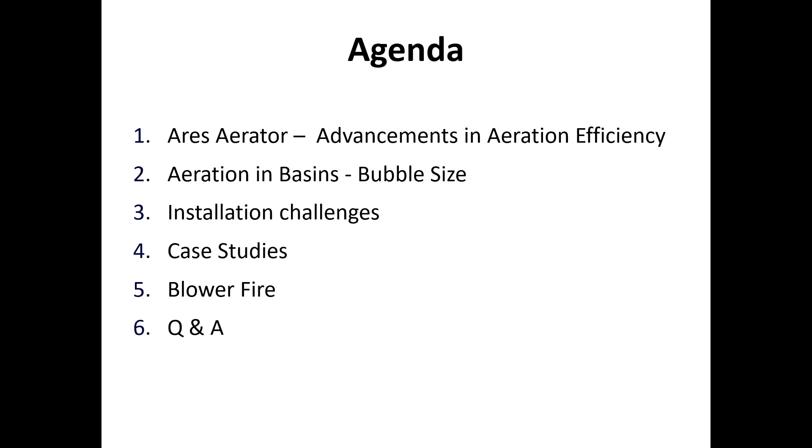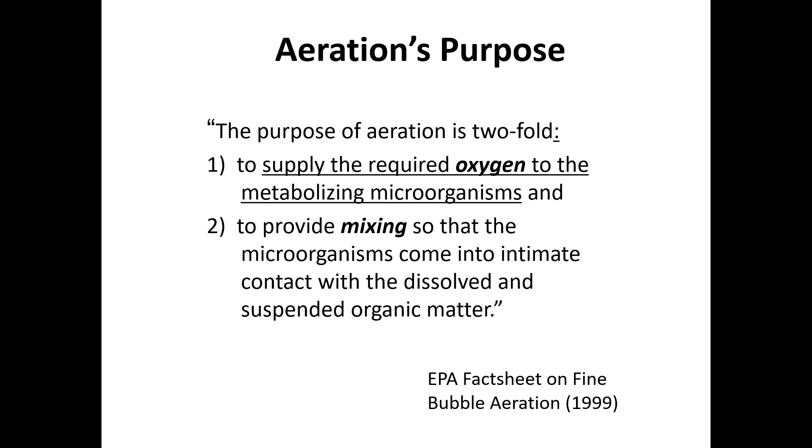So aeration, just at the high level, is all about giving oxygen to the metabolizing microorganisms and providing mixing. It's just the two things. We're putting oxygen for the bugs and we're mixing things up. You got to keep things mixed up so the bugs can get to the oxygen.

So just another high-level understanding in the lagoon space about treatment levels. I want to just cover real quick with this slide. You have a facultative lagoon, which has no airflow, just natural. And you can get a lot of airflow from natural, that upper portion. Humidity and wind is your friend when you're in the lagoon business because air will infuse DO in that, especially that upper 18 inches. And the standard reaction rate for a facultative lagoon, you do get treatment. You can see that those values in the right-hand column.

And then we move to a partial mix lagoon, and generally that's defined as 2 to 5 standard cubic feet per minute per 1,000 cubic feet of volume, and you attach a reaction rate of 0.28 when you're doing your calculations. Then there's a not well-known mix that we learned from an engineering firm some 10 years ago in the West, and the one I just mentioned earlier, just installed in Southern Idaho, which was a municipal, uses a vigorous mix there that was engineered by Jacobs, is 7 to 8 standard cubic feet per minute per 1,000 cubic feet, and you get your reaction rate of 0.85, so it's a little bit more reaction going on.

And then a complete mix is almost an order of magnitude more than partial mix. That's everything in suspension. It's 10 to 15 standard cubic feet per minute, and then you can actually mix RAS too, and that just takes quite a bit more air. RAS, return activated sludge.

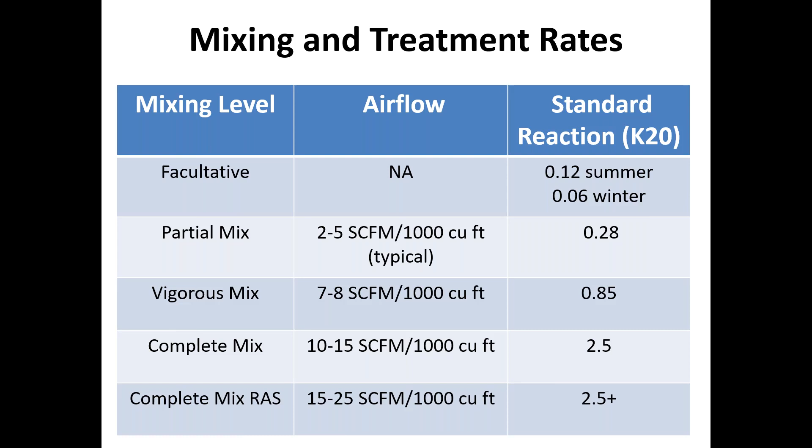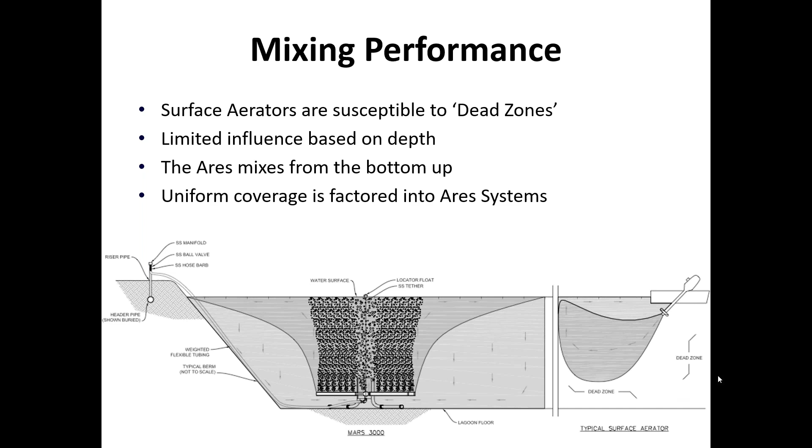So just a profile view here, I'm kind of going to parallel a typical surface aerator versus the aerator that we use a lot and have good success with in food processing. We release air about 9 inches off the bottom, so you destratify the entire column and you mix and you pull in from around the aerator up through a central tube. I got another slide that will show that a little better. Oftentimes with the surface aerator, you're kind of limited, you don't get quite as much mix zone.

Again, this is a cross-section profile of the aerator, and this is a hollow tube. We pull up inside the hollow tube and get solids up into the treatment column, and we're able to reduce solids quite a bit by this sort of mechanism.

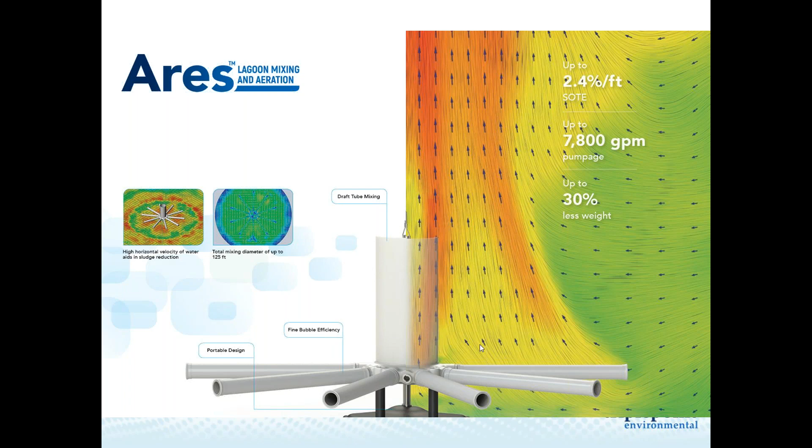Here's some of the shots of computational fluid dynamics work that we have done. Key thing to understand about this aerator is these are all fine bubble radiuses here, and we have a coarse bubble inside that is for mixing. I'm going to get into the sizing of fine and coarse bubble in a couple slides from now. The coarse bubble is about 10% of this flow and gives us a really good mixing, and we get to real good transfer efficiency by these diffuser tubes, fine bubble diffuser tubes.

So this slide, if we were just traveling up an elevator, sitting having coffee, it would probably be the slide I would use to explain how the subsurface diffused aeration works, and the way Triple Point does it, and other companies do this as well.

More or less, we've got a positive displacement blower on land. We convey air through a header over to a manifold system. The manifold system above shore feeds the aerators by flexible weighted line out to each aerator with individual ball valve. Each one of those could be turned off.

In this instance, this graphic, this one's turned off, and maybe they're pulling this up to do maintenance on it or installing it initially, and we can turn the air off right to that one, which also allows you to move air around a little bit inside a lagoon if you want a little bit more air to the front or the back for some reason operationally. As time goes by, you have that capacity with these ball valves on shore.

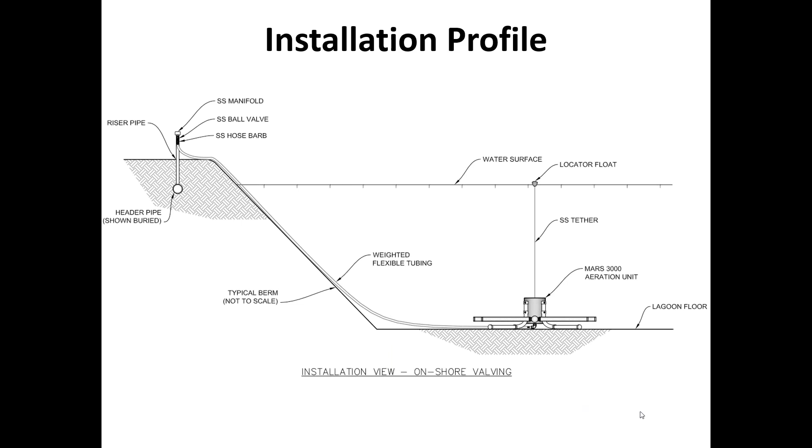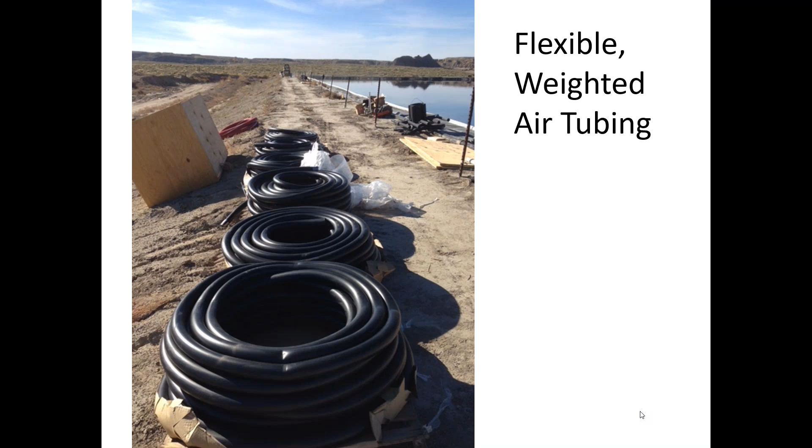And this is just some of that hosing on pallets, it looks like when it arrives. Now, this location I'm at, it's cold, and they actually took these into some warehouse to warm them up. But once you get them pulled out, I say pull them out and get them out in the sun a little bit, and they'll lay just like this.

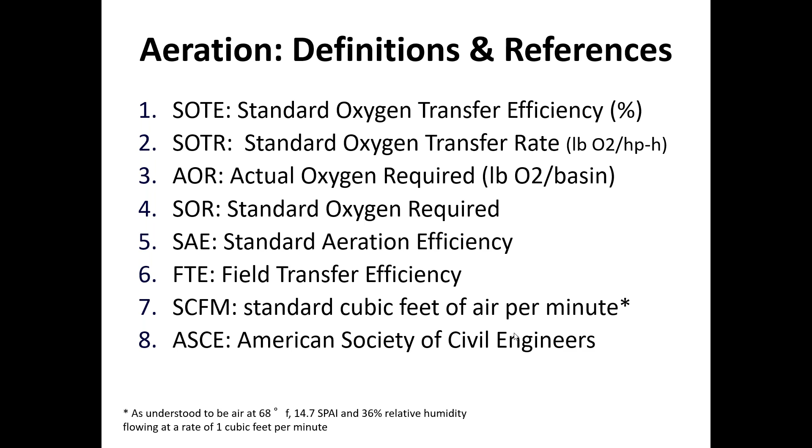So there are typical acronyms used in every business, and most of these are probably familiar to a lot of folks. I'm going to look at SAE here in a couple subsequent slides. SCFM we use, standard cubic feet of air. You can see the rest.

So in the efficiency space of aeration, it comes down to pounds of oxygen per horsepower per hour. If we looked at a mechanical surface aerator, you're looking at approximately 2.5 to 3.5 pounds of oxygen per horsepower per hour. If you went up and looked at a fine bubble diffuser, you were looking at approximately 2x of that, at 6 to 6.5 pounds of oxygen per horsepower per hour. This is significant to look at because we see a lot of mechanical surface aerators.

That's why I'm isolating on that. And this is kind of where we fall in, along with others, with fine bubble treatment. It gets significant because of potential power savings. So if you're running 100 horsepower with a surface aerator, maybe you can get that done with 50 to 60 horsepower of subsurface aeration.

And then the utility company will say, okay, you're going to save that power permanently back to the grid, and we'll run this formula and offer you an incentive for making this upgrade. It doesn't pay for CapEx, but it'll offset CapEx to a degree.

This site I'm at right now, which happens to be an Apple processor, is actually taking surface aerators out and putting subsurface diffusers in, and they are going to get a rebate. We just finished that with a sugar beet processor too, and got a pretty significant rebate. It correlates obviously to the size of the operation.

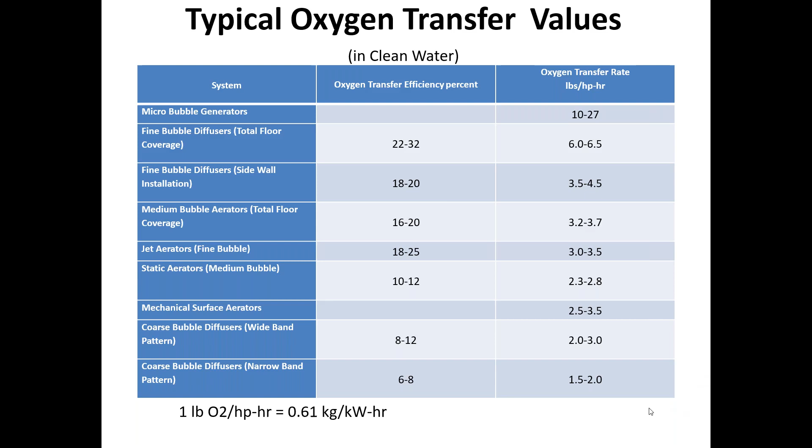Now, I will note that of all these technologies, the SAE test, which is developed by the ASCE, the Civil Engineering Group, is conducted in clean water at zero elevation. So everything gets derated for the constituents in the water, whatever situation you're in. That's linear pretty much across the board, but it isn't exactly so. If you're at 3,000 feet elevation dealing with 3,000 BOD, it would be something less than that in all these situations.

So a couple more 101 statements. O2 is known to oxidize things like H2S, hydrogen sulfide. And I like that point because it's generally considered a chemical reaction, not a long process like biology where we've got to get it up and going for 3 to 6 weeks to get it acclimated. It's the same with the bottom bullet there on metals. There are academic papers that support this, that O2 transforms metals such as iron and manganese to an oxidized state. These are reactions that occur pretty much when you expose fine bubbles to these constituents.

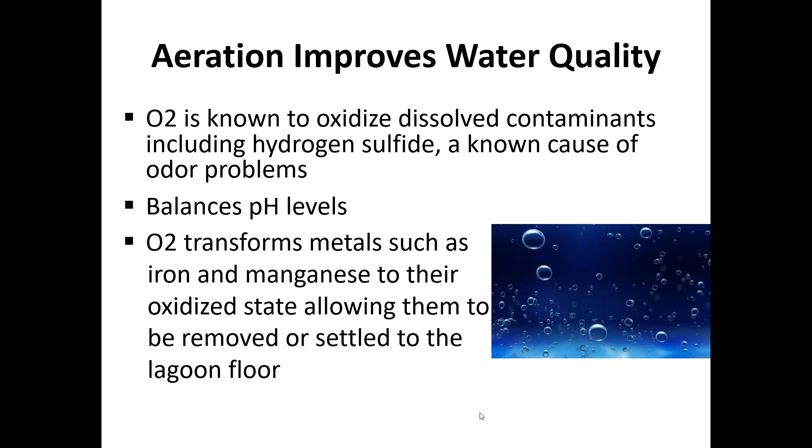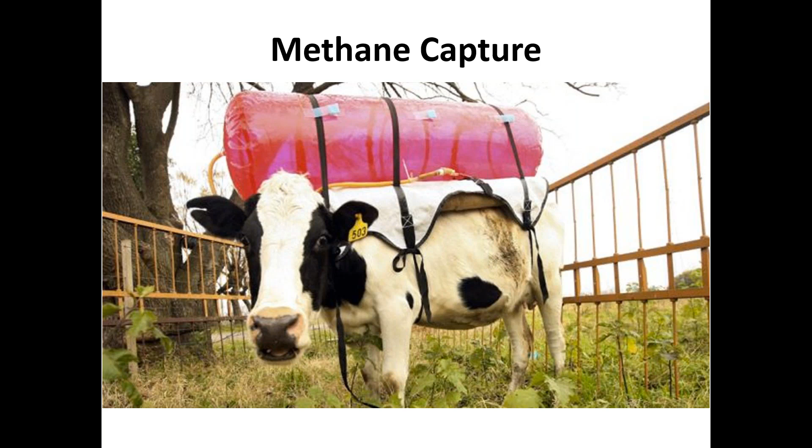And this slide is just, if anybody fell asleep yet, this was a methane capture. This is actually a true research project in Australia for methane capture, but it has nothing to do with this presentation. I just wanted to see if everybody's awake yet.

So getting on to bubble size, all these 3 graphics are 1 cubic foot of air, one cubic foot of a bubble, of volume. So on the left, that's a 12-inch bubble. Think of a basketball as 9 inches, so that's 12 inches. So we look at the surface, square feet of that is 4.8.

Now, if we go to the middle view, and we consider those 6 inches, half of the 12, that's 185 square feet. Now, I said I was going to give definitions, this is where we'll talk about the definitions. Coarse bubble is considered 4 to 6 inches. Literally, 4 to 6 inches is the standard acceptance in the industry of a coarse bubble.

And if we go to the right, what we're depicting there is a fine bubble. Fine bubbles are measured in metric or in inches, generally considered 1/8 to 1/4 inch, so quite small. So you take that same volume, now look at the surface area square feet you've got, 1,800 square feet. That's where you get tremendous oxygen transfer. You get good mixing with your bigger bubbles, your 6-inch coarse bubbles, but the oxygen transfer is significant when you look at the surface area of those.

Also, when we talk about chemical reactions, I don't go deep into this in this slide, and there are others who are way more capable of discussing it, but there's an electrical charge on the surface of those. That's why you get this foaming. I'm going to show some foam pictures that occurred within hours to overnight. They're just incredibly significant. When you have nothing in the water and you put in fine bubbles and turn that on, there are reactions that begin going on right away while the biomass begins to build itself and acclimate over a period of time.

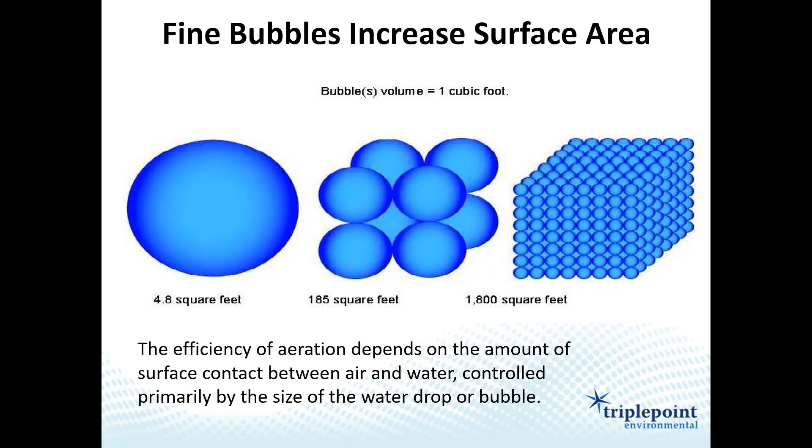Another thing about depth and bubbles is retention time - they hang out more. There's folks working on nano bubbles or micro bubbles, and I think that's cool because I love R&D. Best I know, they're pumping water up to a dike or inside a building, treating it, and returning it to the pond. They get these nano bubbles that don't particularly rise, they just hang out. I think that's a smaller flow application, but if they figure it out for bigger flows, that's going to be very interesting.

But right now, it'd be very difficult to transfer nano bubbles through a piping system down to the bottom of the pond. It's not practical at the moment. But depth and rise time and bubbles hanging out in the body of water - they spend more time hanging out when they're smaller. That's the short version of that thought.

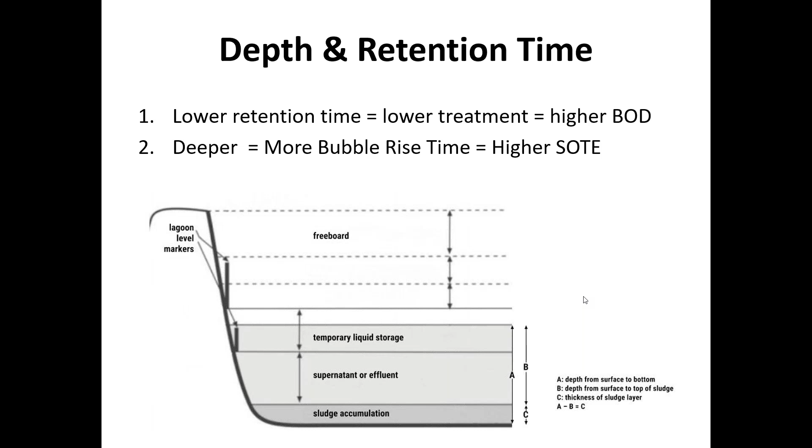And they didn't have a Sludge Judge. So I bought one and went over there, went out in the boat, and did a full grid. And I said, you've got 4 feet of sludge in there. Of course it's less viscous up here than down on the bottom, but it would run right out - it was a runny sludge, not compacted hard on the bottom or anything.

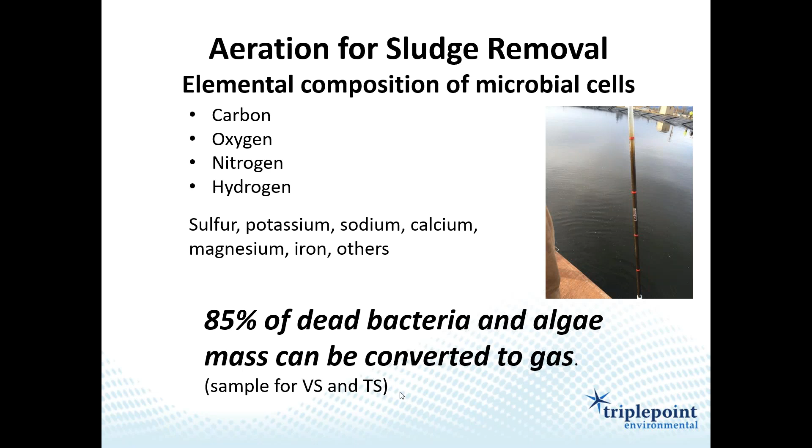And that earlier slide, I mentioned volatile solids - I put at the bottom, volatile solid, total solid, go back down here, sample for volatile solids and total solids. I've got a guy pulling some samples right now, and I pulled these myself in Central Coast at a winery I was at down there. For the volatile solids fraction, you take a sludge judge like that, go out in the middle of the pond, get a solid sample, call the lab and tell them you need the bottles, take the actual solid mud sample to the lab and say tell me my volatile solids and total solids, and they send that number back to you. That volatile solids fraction - if that's 65, 70, 75, 85% - a lot of that solids is available to be converted to gas by subsurface aeration versus dredging and pumping and dewatering.

Another small site - back in 2018 we dealt with sludge buildup and odors. The new lagoon was too shallow. It was brand new, only lasted about a year before it started having bad odor problems. They built it for 5 feet, but it was evaporative with no aeration, so there was no allowance for the BOD load coming in.

When somebody uses BOD, COD, or any of those acronyms, the key thing to me is the last two letters - oxygen demand. There was no allowance for the oxygen demand, so it was going anaerobic because it was consuming all the oxygen, and then it begins to smell. Bad odors, and the wind blows it around - it wasn't a good situation.

So they started adding chemical. You can see there's no grass even growing yet - this thing's a year old, and now they're adding chemical. In these buckets they had little packets of bacteria, and they'd walk all the way around just throwing them out there to try to get something to grow. But again, they're only relying on oxygen from the surface because it's basically a facultative lagoon meant to be evaporative - kind of a tough design.

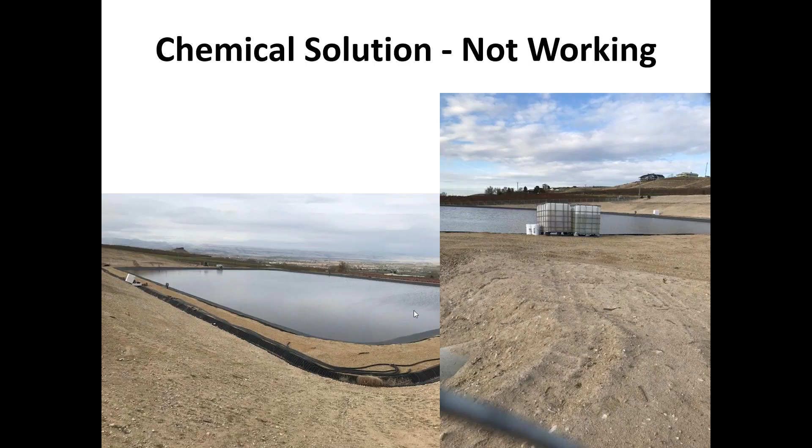Eventually they said, okay, we'll put some fine bubble in there. I said we're not going to be very efficient at 2.5 feet - matter of fact, I don't have a solution for you at that depth, but they did it anyway. This is me out on my boat taking this photo, and this is the installation. The water that day we installed it was 26 inches deep, and it's just not very efficient. We sized it at 5 feet, and the amount of air needed to go down 2.5 feet means you've got to almost cover the entire bottom at that point.

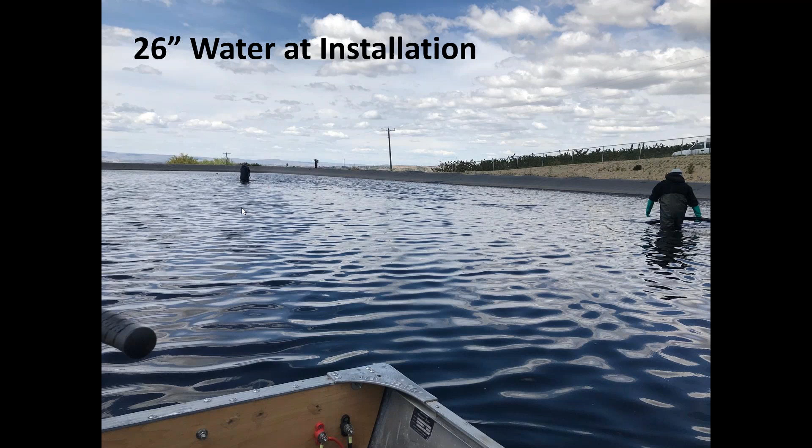He was looking to mitigate odor because they had an outdoor venue for weddings and stuff, and they just didn't want any odor. So we finally got it started up on May 1st. Again, your manifold's on the shore - this is winery process water, hoses going out to it. We used 12 fine bubble only aerators, because even a coarse bubble isn't efficient there - it just gets to the surface quickly and off-gases. So you're just pumping air through to get rid of it. We did fine bubble only.

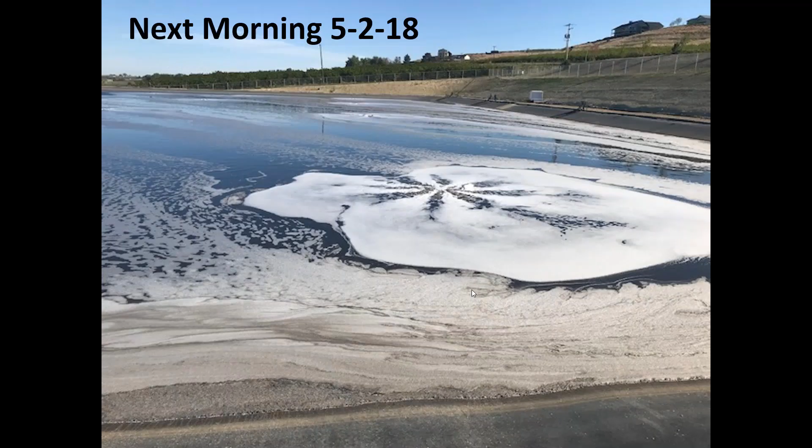Interesting on the date here - notice May 1st, and let's go to the next day. Even as shallow as it was, the solids were starting to really foam this thing, because we're beginning to treat those solids that were just sitting in there. Again, there was nothing in the pond before - we retrofitted it, didn't even drop in from the boat. It was so shallow the guys waded in hip waders, literally. So you're starting to get all this foam, which was a function of those initial chemical reactions, and it's starting to treat and do its thing as it builds biomass in the background to get into more traditional treatment.

So then we got the attention of some larger operators who said, okay, we're kind of drinking the Kool-Aid on this subsurface diffused air fine bubble system, but we don't want it to kick butt and take names. Then 6 months later we're dealing with fouled diffusers, and all we do is spend our time maintaining fouled diffusers.

So we came up with an experiment to show them different diffuser materials and how we would evaluate that in their water. We did one at a big sugar beet processor, another at a wine processor, and pretty much it was set up like this.

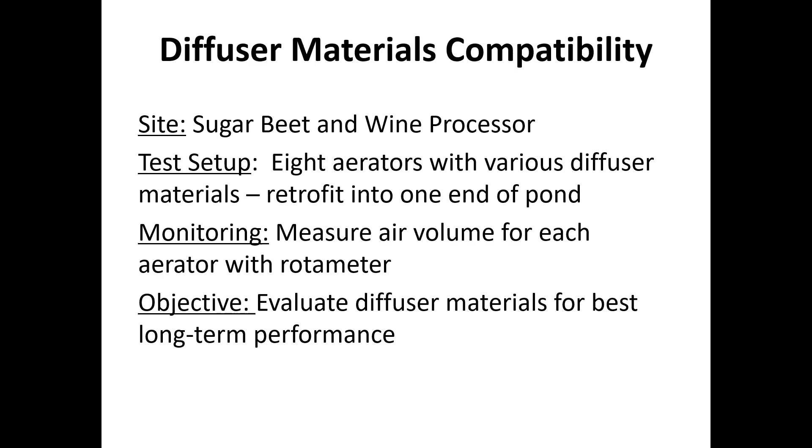We tested a standard EPDM rubber, these black ones are all EPDM. Silicone was the white looking one. These all got fine little pinpricks in them that make those fine bubbles, those 1/8 to 1/4 inch bubbles. The polyurethane one is this greenish one.

And then the rubber manufacturers have been talking about their different mixes. We can optimize one for sugar beet and we can optimize one for pulp and paper. So we said, okay, let's get a couple different of those mixes and try them out.

And then we did a coarse bubble control for the experiment. The coarse bubble is this one, just got holes drilled in it, and we know that's not going to foul.

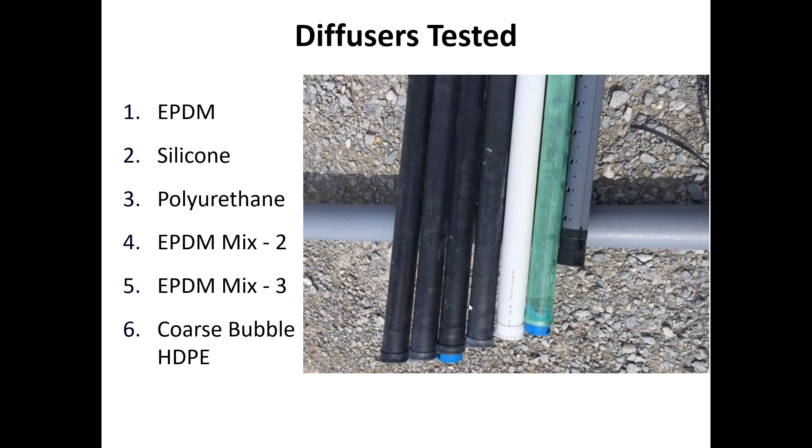So we went to this location, put a 30 horsepower blower, 8 aerators in the location. We're installing it here, putting in that flexible weighted hose. These aerators with different diffusers on them, getting ready to go out.

So then we devised how we could look at these underwater and evaluate them over a 6-month period. We came up with a rotameter method where we'd run the air in, turned our manifold upside down and welded it to this A-frame for this temporary pilot.

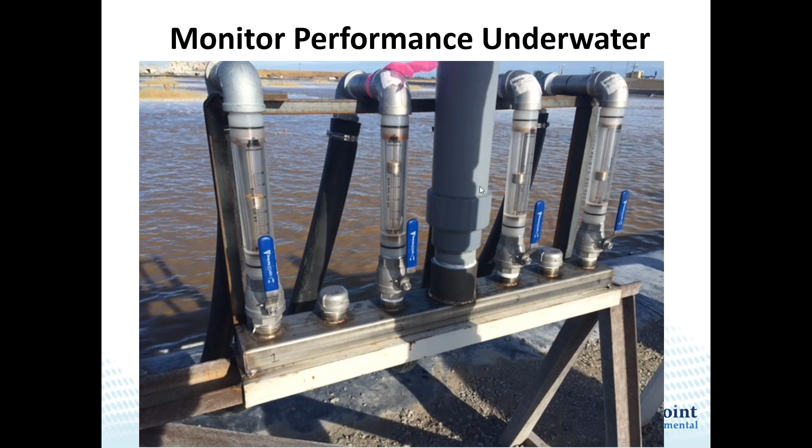And then we ran the air through this rotameter, and the floating balls in here tell us what the level is. So a close-up is here. We can set the level by ball valve and equalize all these.

And then the concept was the operator would do operator rounds and log each one of these. They were numbered and say, well, item number 1 has 40, 40, 40.

All of the materials did pretty good for several months. And then eventually we sorted out that actually the silicone oriented material was the best material, and we use that a lot now. As a matter of fact, we almost default to it in municipal and food processing unless there's something unique or different where there's a materials compatibility issue.

But it was an interesting experiment, and we ran that at a sugar beet site for several months, and then we moved it to a wine location.

And the irony of that one is we started out, I told them, based on my experience, I think you'll know what you need to know in 3 months. And it was also a paid pilot. They wanted us to come and look at it because they were looking to make a big CapEx move, but they wanted to dig in a little bit, make sure they're buying the right thing.

The site continued to rent it and rent it and rent it because the experiment itself was actually augmenting their process so well. Their pH was improving. Solids were reducing within the cell that we were in.

We actually did a Secchi disc and sludge judging every 5 weeks for several weeks, and we just ended up going down, down, down, down, down. And they kept renting it. It was like a year and a half later, and they just kept renting it.

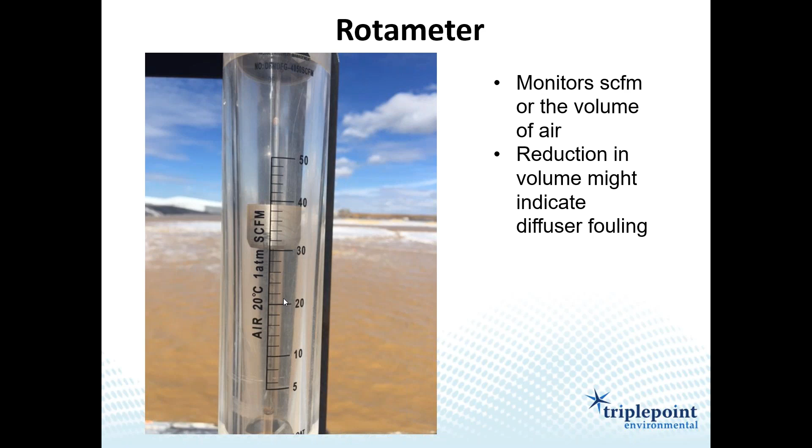And then COVID hit, and so then they didn't have a very good direct-to-consumer business going, and they did not procure. But I think that they are pretty impressed with the system and will move down the road.

Another small one we did, and this is at the other end of the spectrum, like a 5,000 gallon a day guy wanting to go to 20,000 gallons because he's going to add more capacity. He was using drip irrigation, so that was plugging. So he needed to clean it up quite a bit better.

We went down there to a little pond, and I don't even think I have pictures of this one, but we did a fine bubble system, and they've been chugging along since 2018 down in Healdsburg.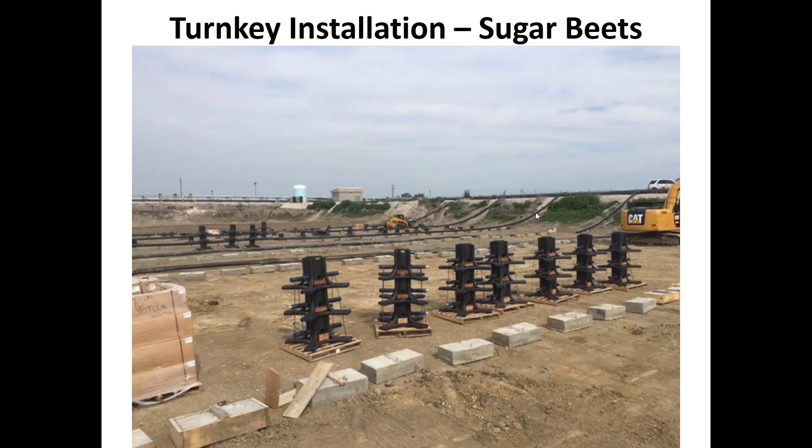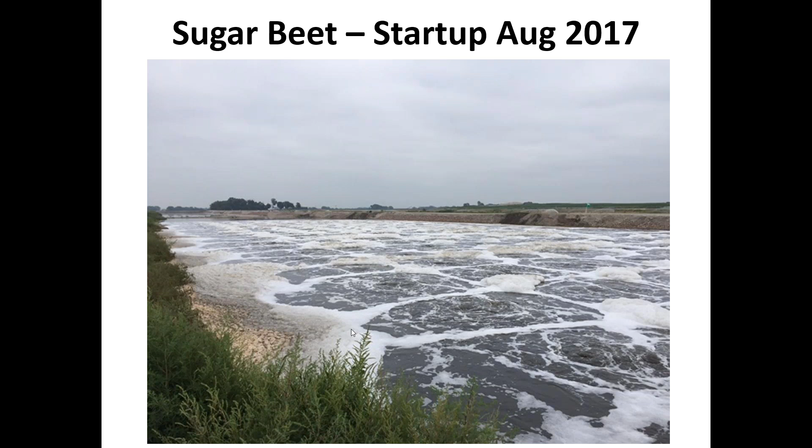And then later it looks like this. Again, right after startup, you get all this foam going. And foam's not new anywhere, we didn't invent foam, but when you see that foam within 24 hours of startup, you're cleaning some stuff up pretty good.

There's a lot of reactions going on there.

Moving on to another sugar beet example, I showed this view because it was very challenging. This is the bottom of the lagoon with a 2% slope, so it's quite a bit deeper in the middle than it is over on the toe before it goes up to the top of the dike. The second requirement was they wanted to fill it, empty it down, fill it, empty it down, and treat as much as possible all the way down.

Previously, their surface aerators could not turn on until there was 8 feet of water in this 11-foot sidewater depth pond. So they had no treatment until it got up to that level, slow, and it might take six weeks to fill after emptying it down. So they had nothing going on for 6 to 8 weeks until it reached the 8-foot level, then they'd turn on the surface aerators and pour the horsepower to it.

So they wanted a solution that allowed them to run air all the way down, equalize pressure, and not damage the liner. The other design criteria was 12,000 milligrams per liter COD, and they wanted less than 500 out the back. They land-apply to their own land. It's a large basin, 20 million gallons, and it was going to be a dry installation. They wanted turnkey, one party.

Eventually, after various testing and meeting the folks on site multiple times, they decided to proceed with us, and we put it together. These next slides will kind of animate that.

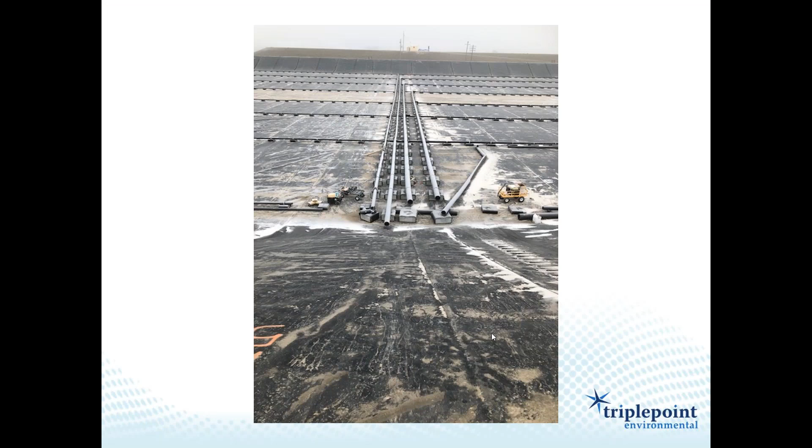So the air comes up and over and down, and they wanted it bottom fed, since you're going to fill this up and drain it down, fill it up and irrigate it out, repeatedly. Each one of these side laterals feeds two of the longitudinal laterals - for example, this one on this side feeds all the way across and over here because they're just slightly higher elevation. This is during some of the construction process.

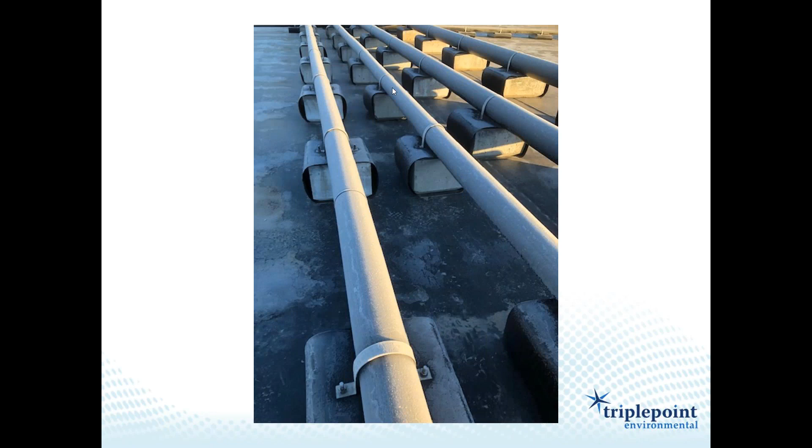A closer view of those pipes going out. Now these straps are intentionally loose, because when they lower it down it might sit there empty for a few days, and then the heat hits this HDPE and makes it want to move. So these straps were allowed to permit movement if it's completely drained down and sits in the sunshine, or just with temperature change, as everybody knows how HDPE will move.

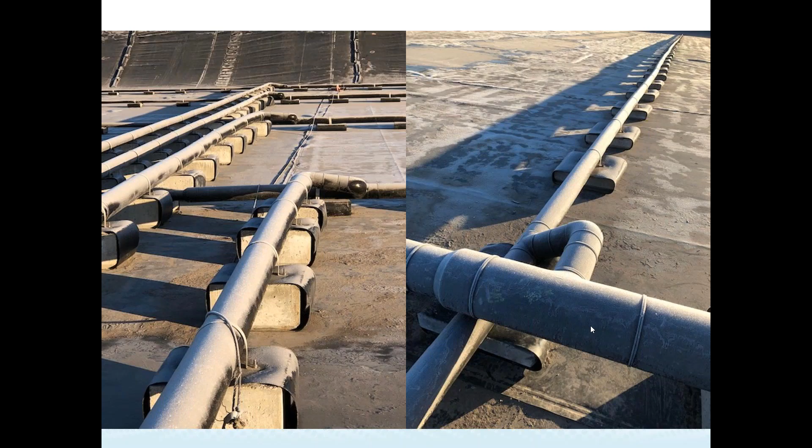Some other random shots - all of this was designed by Triplepoint engineers. The tapering, when running air over long distances, starts at a 24-inch header and eventually gets down to 4 inches at the farthest reach, but it's all tapered. There are orifices on all the aerators, so the pressure is the same everywhere when you turn this on, and that takes into account the slope - it's deeper in the middle and not as deep up on the slope.

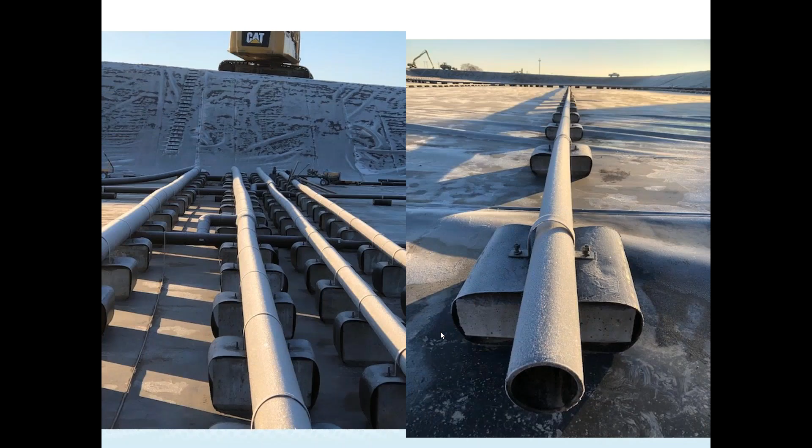Here's that shows that distance again. This one's getting ready to be capped. There was fusing equipment down inside there that did a lot of this work.

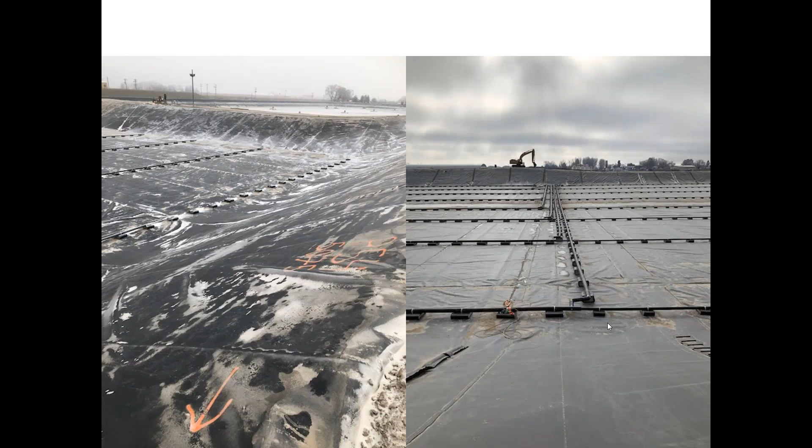And just some other angles of different parts of the construction.

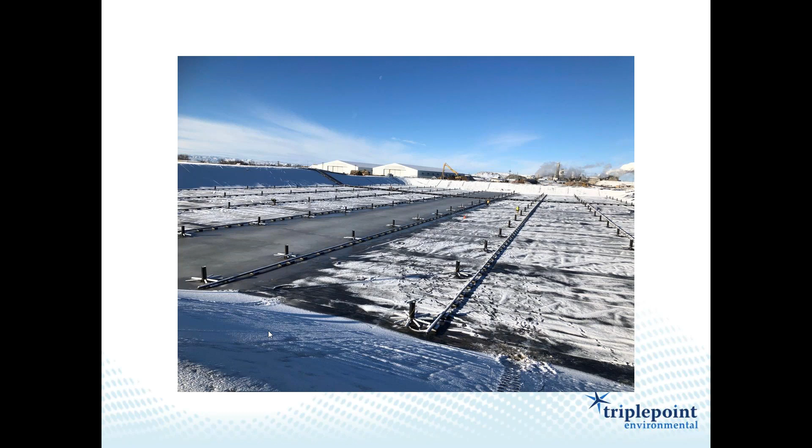Of course, in winter now you've got aerators down here. There's just a short piece of hose coming off the takeoff on these submersed laterals, feeding those. Again, you see the water in the middle is, some of this is just from the snow melting and rain that may have occurred. It's getting deeper and deeper in here.

And some of the final, you're wearing rubber boots towards the end in this thing, but there's very little stuff to move. No ball valves down here. Everything's controlled up on shore as far as turning something on or off.

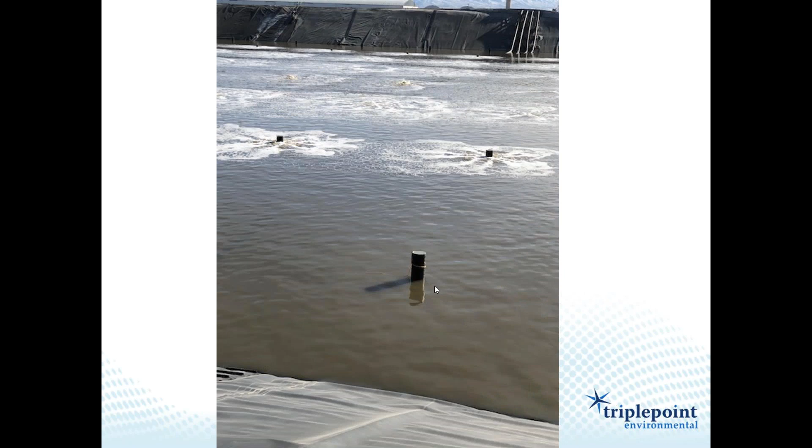Now this slide shows the depth in the middle. They're out of sight, those tall canisters are out of sight on the aerators, and over here on this upper shore, they're sticking up quite a ways.

So they have a mechanism via a ball valve or a butterfly valve set up. They can turn this top one off but keep doing air when they've only got 3 foot of water, 2 foot of water, so they can really treat clear down to the nominal amount of water.

And the overriding problem statement here was odor, frankly.

Here's the blowers, set downgrade. Each of them had an arc flash spec here, so you got 2 separate panels running these 200 horsepower blowers. Air comes up over the dike and back down, and this is where they can valve off some of the different laterals down in the pond as it begins to subside.

So they have an operational scheme whereby, via VFD, they'll run 2 blowers at once, then they'll eventually shut 1 blower off as they begin taking water out. Then they'll go over and run the VFD down when it's way down to just the center of the pond, but they can actually keep applying air clear down to a very, very low level, almost a foot of water, because we're at 9 inches, and they can run it clear down that low.

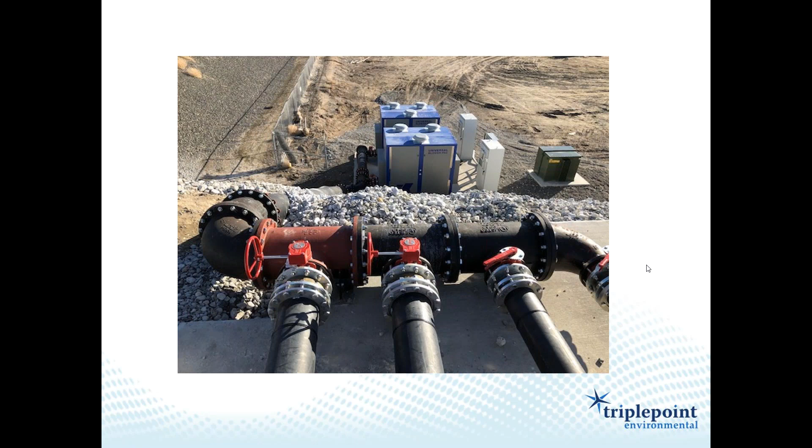So they're getting a lot of oxygen and don't have to worry about odor too much anymore. And then when it's all said and done, here's a drone shot. This is the view, what it looks like, and it's meeting the effluent that we're looking for, from 12,000 down to in the hundreds, going out to land app, and they drain it up and down.

I went back on a couple visits when they drained it down. I wanted to look at it and observe it. They do know if they drain it down, they've got the diffusers out there, and it's going to be a while that they must spray those off.

They're toying with a method of only draining it down till it's above the diffusers, because if a diffuser gets out in the air and mud starts sitting on it, it will dry and potentially foul it. However, they have noticed a few times where that occurred, and it seems to scale up on these silicone diffusers. We did go with silicone here, and it'll almost peel off like a hide on a snake or something. So they're continuing to look at what they might do.

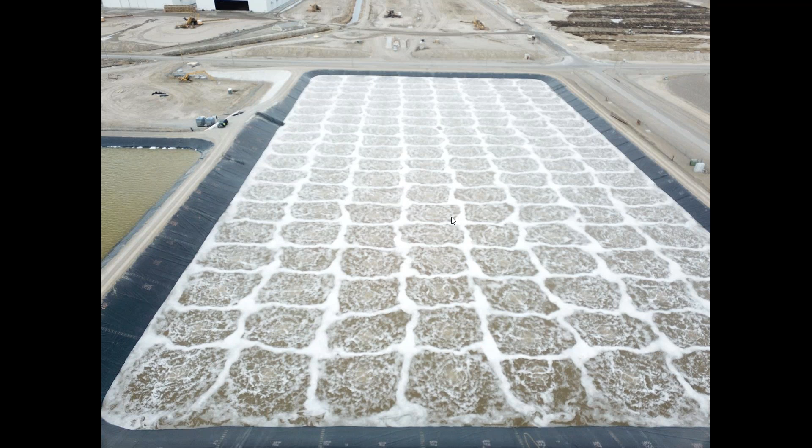They're also talking about making this more of a throughput pond, because they've got a lot of investment, a lot of treatment here, and they might treat from here and send it to a pond over here or another one adjacent. So, moving on to a winery.

Here was another greenfield winery situation, and I happened to tour this location in 2018, and I took some drone footage of its existing pond and these brush aerators right here, and a storage pond, and he land applies over here. So his design criteria coming in, he wanted 1 DO coming into this pond out of the new ponds.

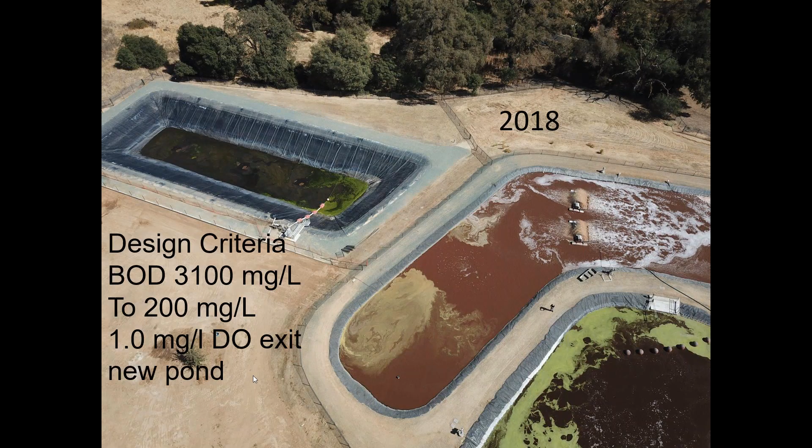So as I was there in 2018, I actually happened to take some footage just elsewhere, and this is where the new pond is now, as you'll see in a subsequent photo. And then bottom screen here is the brush aerator pond. I just happened to take a picture of that and used it.

So we helped them, and I wanted to mention here, this guy has a Headworks, and he does really well getting a lot of the shells and husks and stuff out of the water before it goes into the pond. And interestingly enough, he has on the order of 3,100 BOD, and most of the time we see 5,000 to 7,000 in a lot of the wineries. 5,000 is some of the engineering groups just say put that as a placeholder value while we're doing calcs until we can get another actual field sample, but he's pretty consistent around 3,100. I think a lot of that is he keeps some of this stuff out as a Headworks, just like you see in a municipal sewer plant.

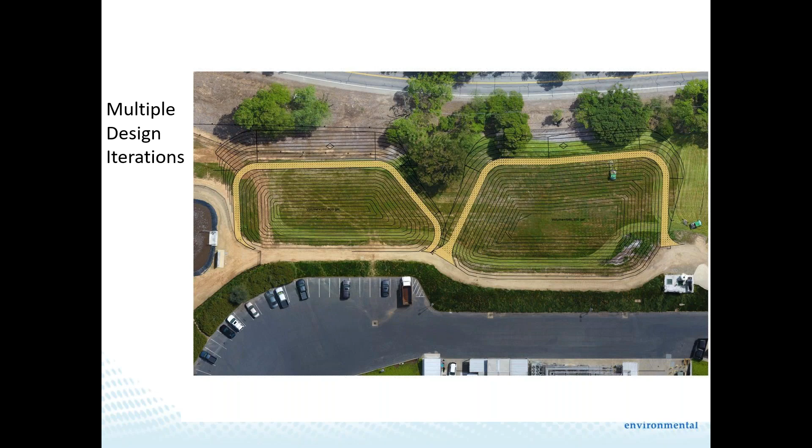So here was one of the conceptual drawings. At first, I wanted to do 2 ponds, and we helped a lot with this. Matter of fact, we recommended the final volume. I told the operator, I said, look, if you're going to spend the money and do all the civil work, put a liner in and build it. Try to get double-digit days hydraulic residence time for whatever your flow is. You got double-digit days residence time. And so he eventually got with that. We went back and forth on the slope because he was going to a steeper slope. And I said, if you open that slope out, you actually gain this much more gallonage, which gains you residence time. Anyway, we eventually arrived at one single pond.

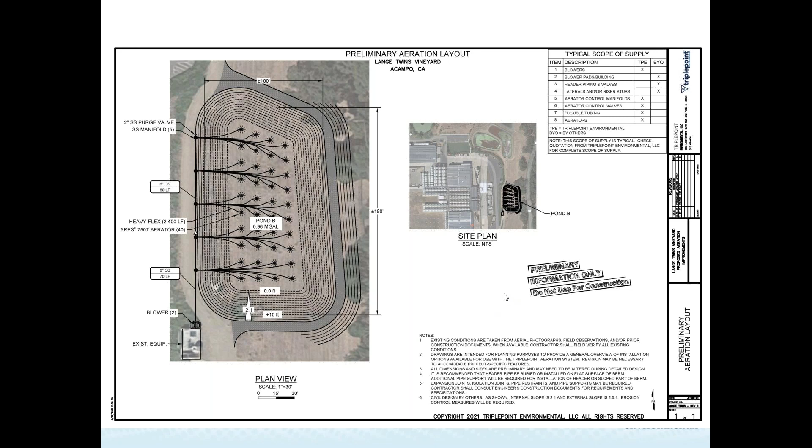We're going to put blowers up on by his headworks screens up here, and this was kind of our preliminary layout drawing for the site. And then we went ahead and he wanted it turnkey, didn't want to bring in a bunch of other folks. So we did a piping schematic for the site, which detailed the actual pipes needed to buy all the way, and the order of construction of all those pipes all the way through the system. And here was a bill of materials you needed to get, and he did all that. We did that as a value add for him, and he went and bought this from the pipe company and was able to save a little money on that, and we just helped him out in that regard.

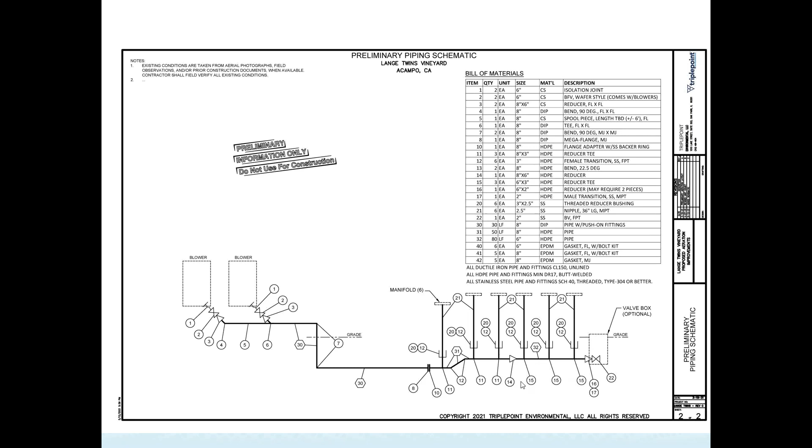That's our bag day in, day out.

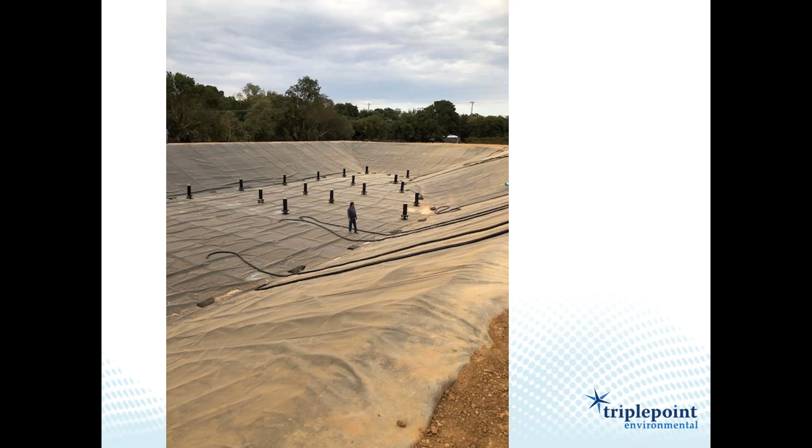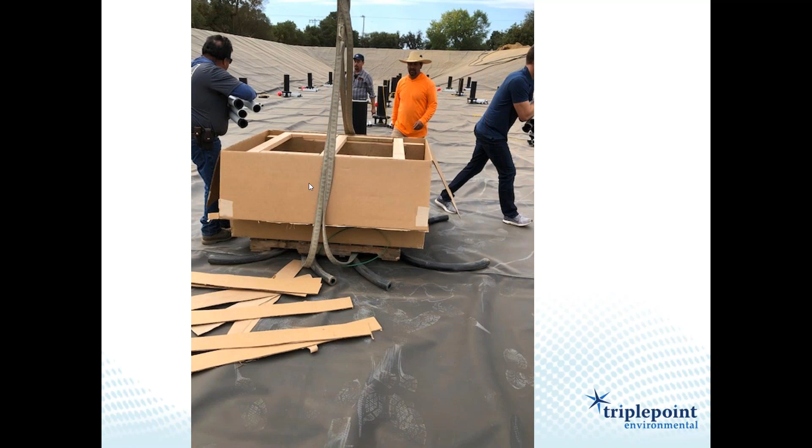And so here's starting to take shape. We're sticking the risers, don't have diffusers on them yet. We've run some of the hoses over the hill. The hose management was pretty difficult this site because it was tight quarters. So we would do it just in time, kind of, so we could stay ahead of the game. And then we just put the whole box of diffusers, because they had the crane there. We just picked them in, and we started distributing these diffusers just out, just piling them up over here. And then we'd go back and connect all of them.

Here again is that flexible weighted hose, and then you had the beauty of looking at exactly where it wanted to go. Oftentimes we're on a boat, dropping stuff down on a pond, as we'll be doing at this apple processor I'm at. We've got a pontoon here, and we'll be out and come from the shore over to the location, and then we'll drop it. You won't be able to see it, but you can there. Hose management is a big thing here, but we got through it. Sometimes you just have to schlep hose.

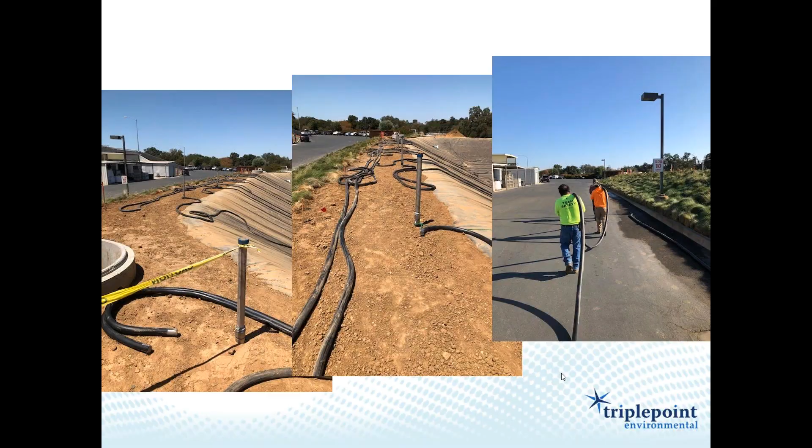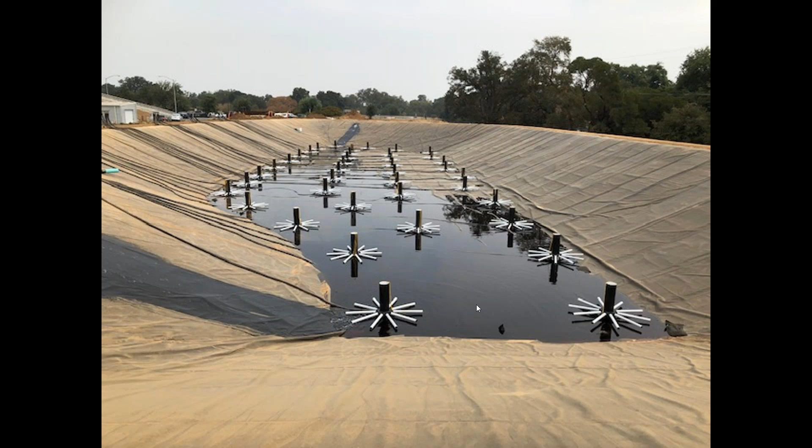Now we're starting to get more water, and he started pumping in water on this end too, because we're trying to get enough water to turn it on while we're down there, because once you have all this in, and you've got to get it up, as me as the startup guy and the installation help, we got to get enough water over the top of these so we can vet it. And this was also very hot, 97 degrees out during this installation.

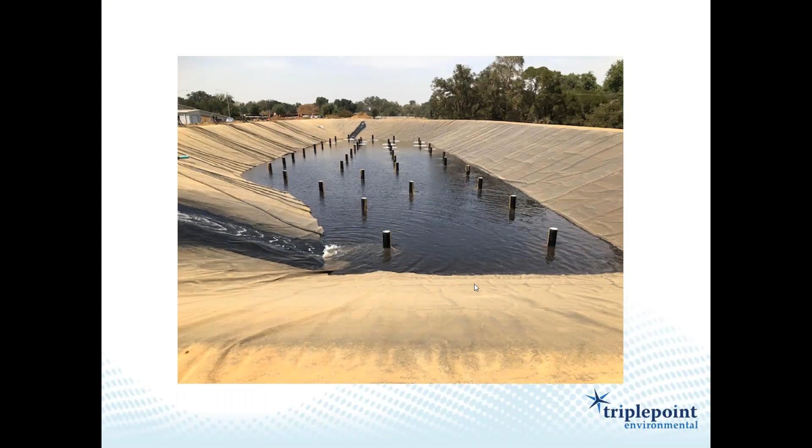And now they're starting to get a little deeper, but you can see the taper. These back here are still above water, but down here they're below water. Intentional design.

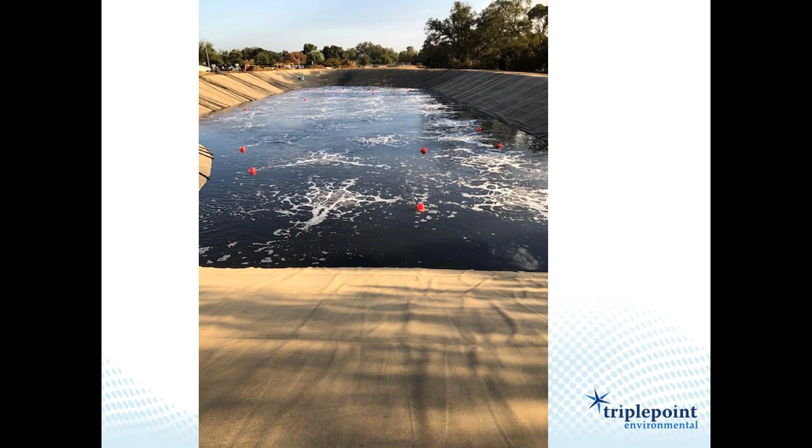And we first turn a little bit of air on just to vet everything. And then eventually he gets it up to 11 feet. And I wasn't there when it got to 11 feet.

I left the site, and it took him, I don't know, several weeks to get it completely that full. And he sent this picture. He called up and says, this thing is really foaming. They turned this air on with all this water.

I said, well, it's in the middle of crush, for one. It's the middle of season. Their maximum amount of water, their maximum amount of contaminant. But it's the first time you've seen air in this big pool of water, and you're hitting all that, as I was talking earlier in the presentation.

And so anyway, we discussed that if this is starting to climb up over the freeboard, we can mist it with water, or you could actually get an anti-foaming chemical. And also we're learning at what point to run the air.

We oversize everything a little bit, and he could go into, you can lean into the throttle, so to speak, and maybe we're sending too much air to it. But it turned out to acclimate, powered through this, and subsided, and it was a non-issue in the end.

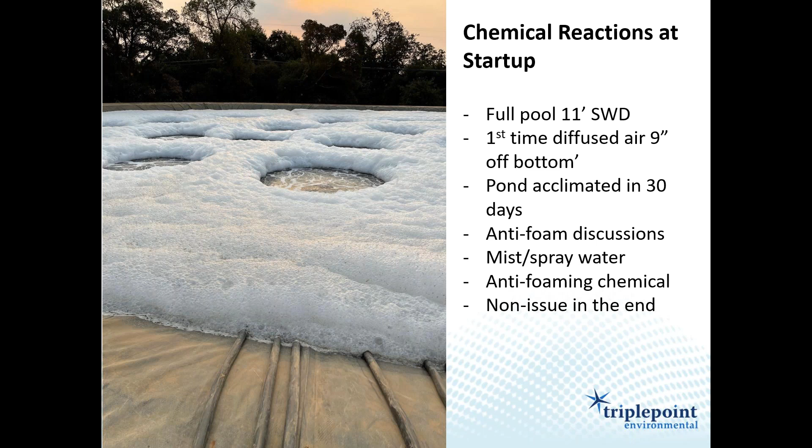So I talked about the blower fire, and let me progress to that.

200 horsepower blowers, big blowers. They were supposed to start at the same time, but they were Gardner-Denver product, and Gardner-Denver blowers by Universal Blower Pack. And so we got the first one there in January, and I was there and got that one started up. So the other one didn't show up till a couple months later.

And it was the one that was the second one that didn't show up that caught on fire, because we weren't there to set it. We worked with the local contractor to pick it with the crane and set it and connect it. But the belts weren't double checked for alignment.

And that's, again, eventually what's going to be the problem. The ponds fill, irrigate out to empty. This pond right here, there's water ponds all over the site. This is the pond we're dealing with.

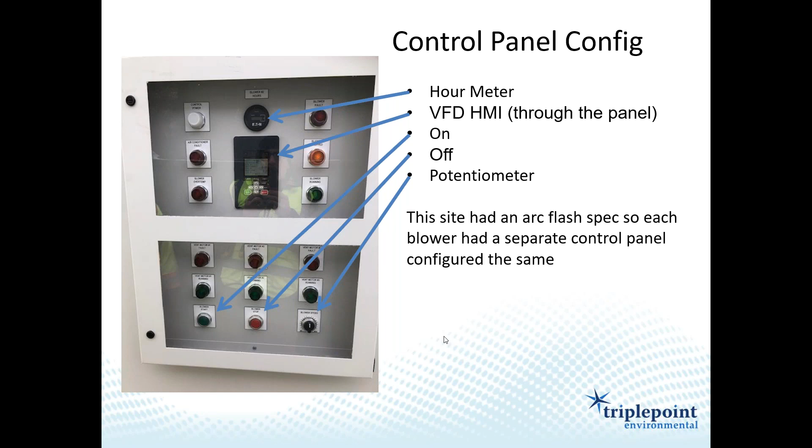Picking and setting the blower. Blowers at that view, separate control panel for each one of those 200 horsepower blowers.

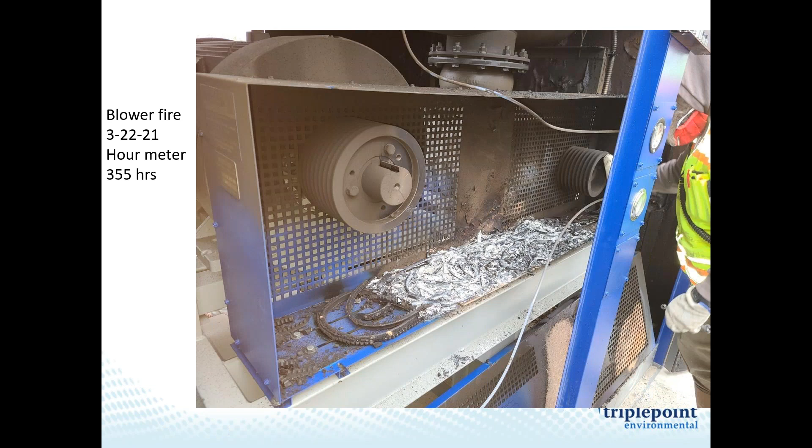So then this happens. So they got it started in March, blower fire on 3/22/21. Environmental manager calls me and says, whoa, 355 hours on a brand new blower.

And these are 8 belts wide. And that's going to be a key point as we look at the subsequent slides here on what happened, what occurred. So this is what it'll look like when they get to it.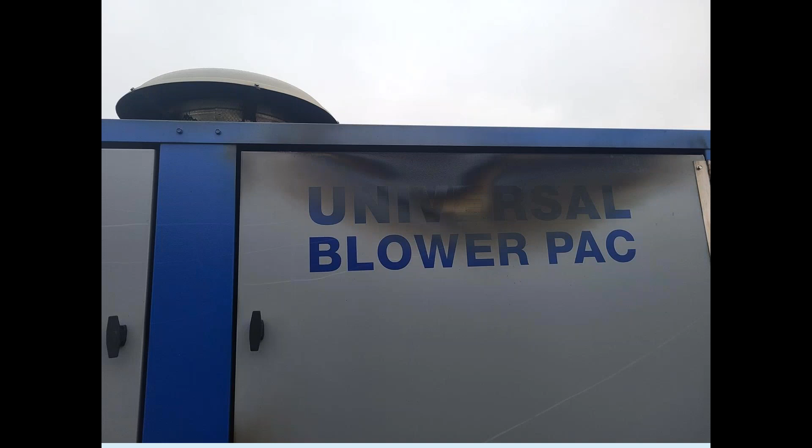And it just made smoke damage, it melted things, created some heat. So what our concern was, do we have a material issue, or is this cosmetic or messy, or did we ruin a motor or a blower?

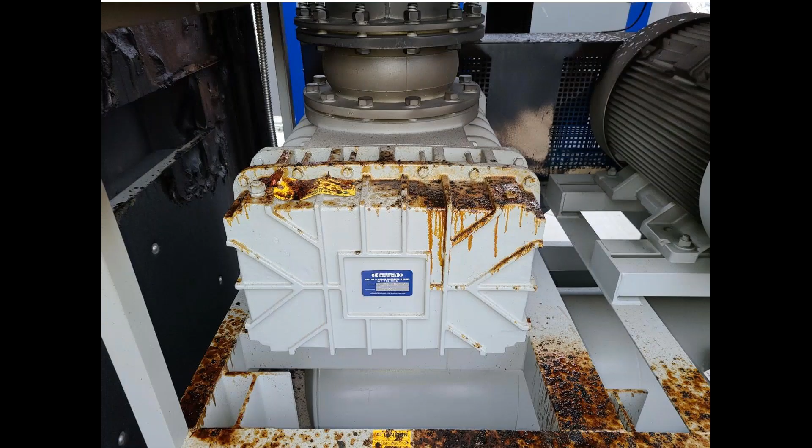And this site has electricians on site, maintenance staff. It's a very, very large site, maintenance people. And so our first response was, okay, is the fire, is the heat out?

Yes. Does the blower and motor spin freely? This is over the phone. Yes, their guys vetted that. We said, check the oil level in the blower, pull a sample for visual and lab testing. There's a certain thing you look for, and it indicates if it got too hot or not.

And then we had spare belts. They said we could put those on, realign and tension the belts, make sure we align the belts. They said they have blowers all over the site. They're familiar with doing that. And they used the angle irons, the straight edge against the pulleys.

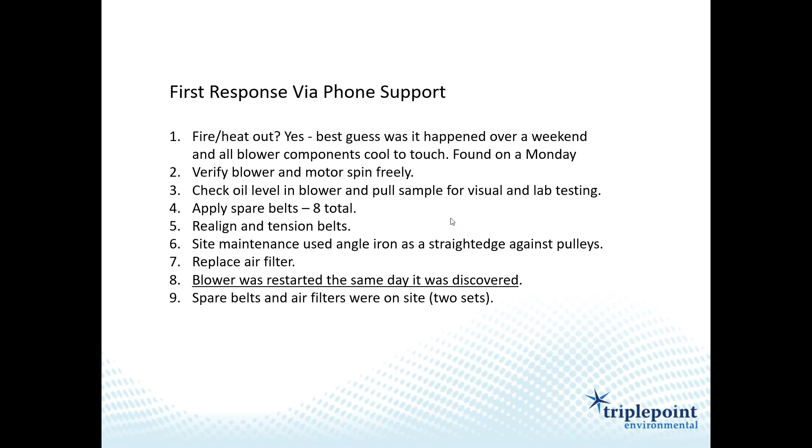Replaced the air filter. We had spare air filters. The blower was restarted the same day it was discovered. They cleaned up some of the ashes, got out of the way. They had spare belts and filters. In the meantime, their second blower is running, so they're getting air to the pond. But they were only down that day.

And then at 733 hours, same blower, same thing again. We're like, what in the world is going on here? So I called Universal Blower Pac on behalf of Triplepoint and said, send your man, we need to go out there and see what's going on. I feel like I just handed these guys the keys to a new Porsche and it's just burning. The key doesn't turn on, or it doesn't go. What is going on? And we went out there.

All this was, at the end of the day, we verified too that this time the environmental engineer actually came by and he saw embers, so he used his fire extinguisher and cleaned up some more things. But he wanted to make sure the wind didn't blow an ember out and start a fire somewhere.

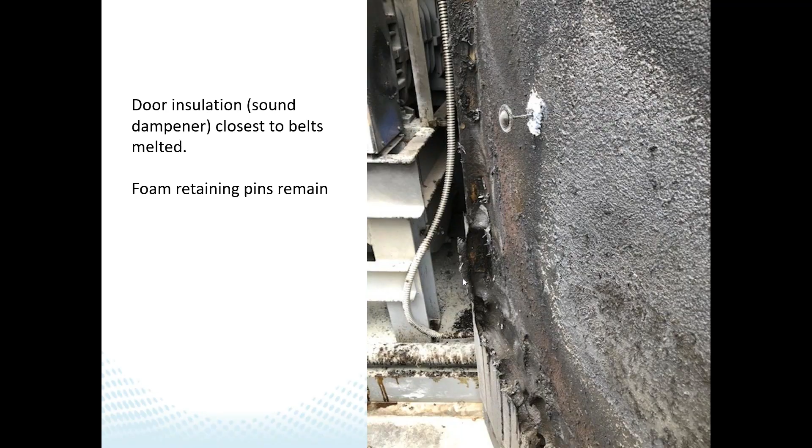So we brought the guy from Universal Blower Pac, and we free spin the blower. There's no paint bubbling on the blower, it didn't indicate really hot. It was kind of superficial, melted, nasty. It was just dirty. We brought things to clean up and get it back in gear.

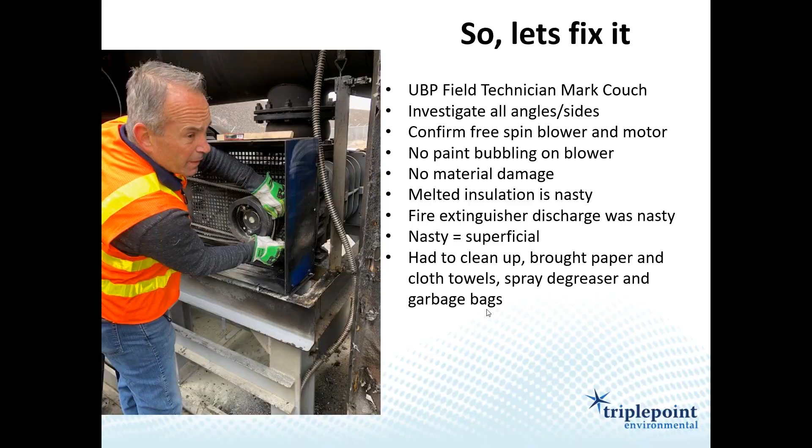And so here's putting the belts back on. Now that's a pretty good distance across there. And the angle iron that was used out there previously, it's a two-man show. There's no way you can hold that angle iron up and look for all these contact points right here. And you've got 8 belts, and you can think if you're slightly out of line, it's different on the 8th belt on the outside versus the one on the inside.

And that's what turned out to be the issue. It was just out of line enough that you've got belts turning and burning and slipping, and it just was not aligned. It's not as big of an issue with a single belt or a 2 belt. You also want them aligned, but the alignment gets incredibly critical. These shafts have to be spot on parallel when you have 8 belts. And that's really what the deal was.

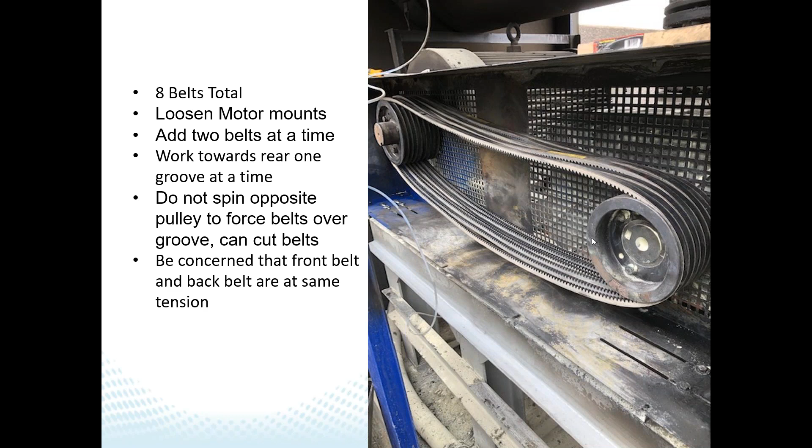And so for each one of those, he said some guys will force all the belts on. He likes to put on 2 belts at once and work them to the back, then 2 belts, then 2 belts. And make sure you've got enough slack between here so you're not really jumping it over the edge when you're putting those on. And then use their tension device tester based on what the manual says, and set each one of these tensions.

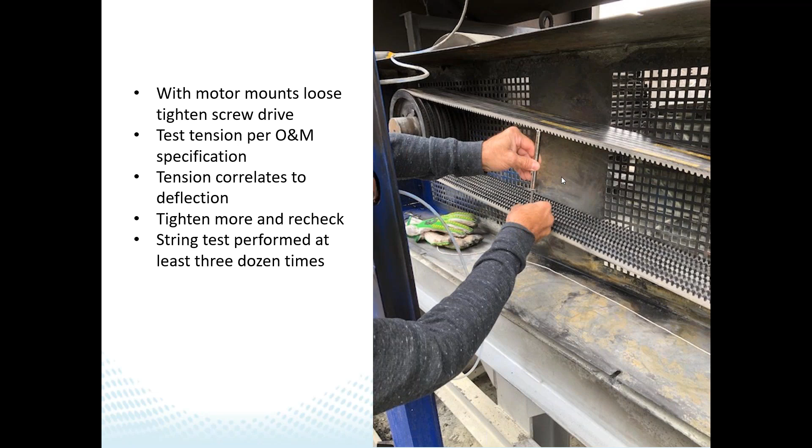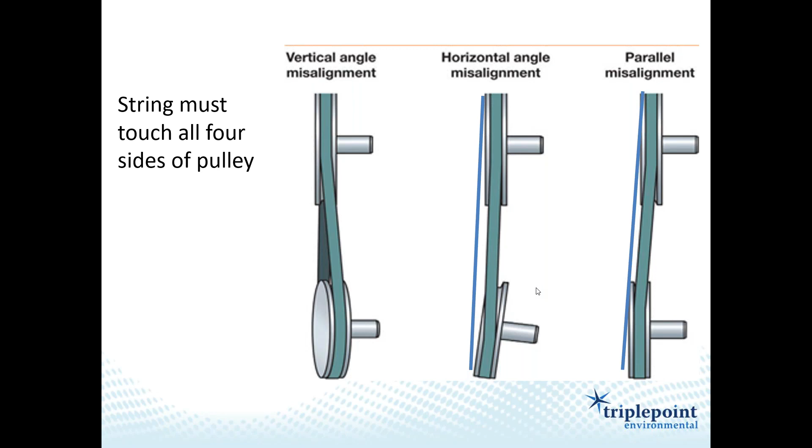And you've got 4 touch points really at the outside of each one of these. Now if you have a nice straight edge right here, you can see it in a smaller blower and hold it up and get a nice visual, but I'll tell you, this string, when you hold it, was 2 guys that took us both. Now you could tie it off like that and come over with one guy, which is again a lot easier. With string, it's very hard to see holding up a heavy piece of angle iron.

You should touch, touch, touch, touch, 4 times. If you have any air right here - and when we're doing this, we're looking at it, and it was like 2 millimeters, that's not good enough. We had to get it touching all 4 points, given the criticality of 8 belts, and we did get there. Just a final thing I want to add here, a couple more slides.

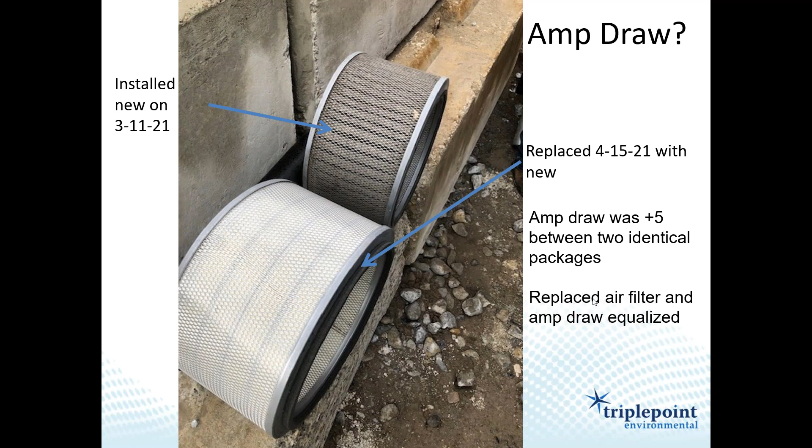This was interesting. This was all going on close to the same time that one of the other blowers - they observed when operating, simply looking at the blower panel, that one of them was running at X amps and the other one was X plus 5, at least 5 more amps. Why should it be this? Yeah, it should be the same. It should be negligible, almost identical, because it goes out to 2 decimal points.

And the irony is, if you look at 311, it was a new installation, and at 415 you had five extra amps. What's going on? Do we have something going on in the system? Is it a valve, pushing head loss against the system? It was this: there was simply a lot of riprap going on. The wind blows there, and this air filter was picking up all this dust, and we simply changed the air filter out, which you would not normally think about in a 4.5 week window.

And it solved the problem. So when it's fighting against trying to suck through there and it's dirty, it's going to work harder, and it's going to draw more amperage.

Couple final notes. We've been doing more and more mobile units, like in this frac trailer type of environment, for ammonia and total nitrogen. I know we're working on one at a beef plant in Iowa right now.

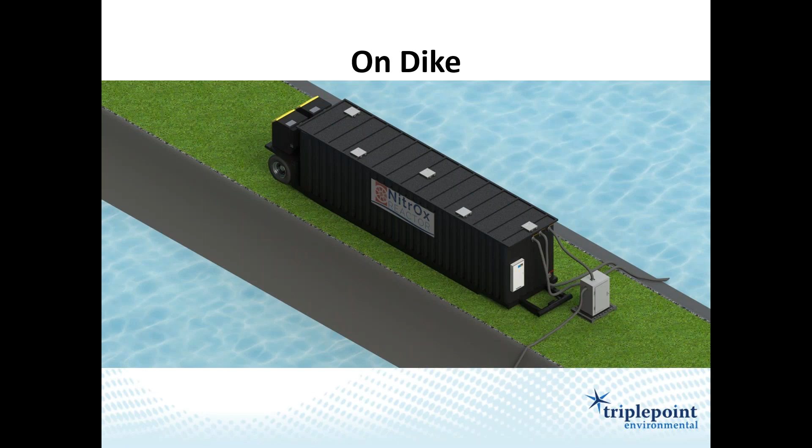Here's one on the dike. This is one we built for waste management, for landfill leachate. They had an ammonia issue, so this is a mobile unit with a blower set right in front. It's fully self-contained, you can bring it in. We've done these as rentals multiple times.

We did a rental for another company that had a groundwater nitrogen contamination issue. It was a munitions manufacturer, they used nitrogen in that process. We had a couple systems out there, and they just said they wanted to buy them from us.

But as far as a quick turn unit that might do seasonal work, or if you need something soon and can't go into a big long civil capex year-long procedure, we're seeing a little bit more demand for this. Again, one's a meat processor. I think we're set up right now.

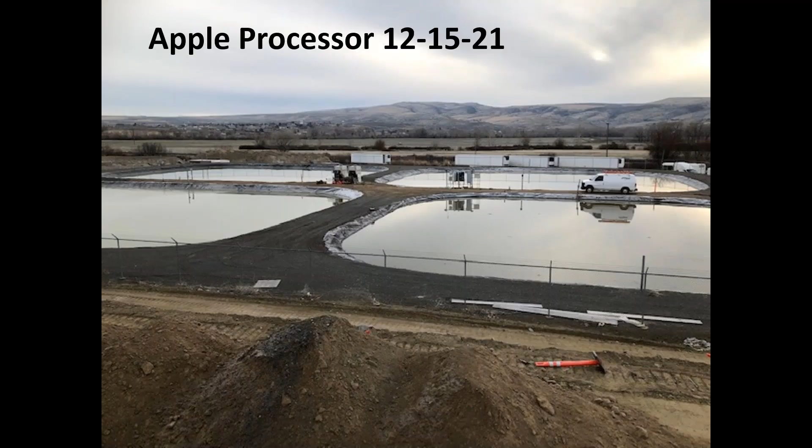And then I'm at an apple processor. I actually took this photo this morning, and their electricians are out there wiring the blowers up, the panels over here, and they just pulled all their surface air off. We'll be putting in subsurface aeration over the next couple days.

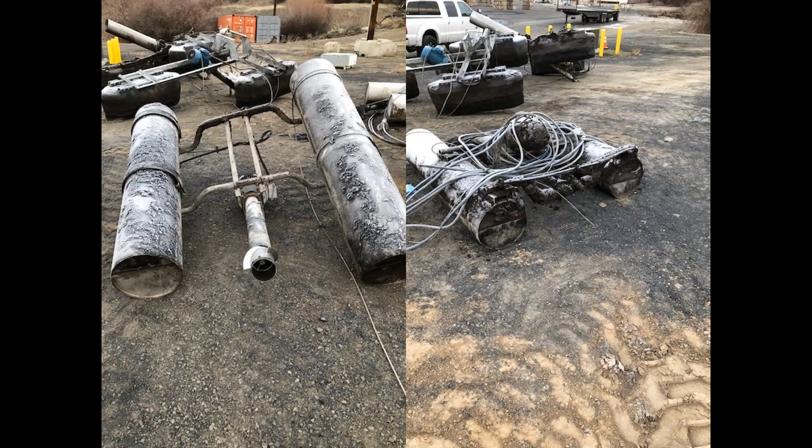And they pulled all these old surface aerators out. They were just getting odors, and it just wasn't keeping up. These things can do okay when you first put them in, but when you've got a deeper pond, it's just tougher. The solids pile up on the bottom of that pond, and you're either going to have to dredge or do something else. In this instance, they're doing something else.

So that's the end of the presentation, and I'll probably do an apple update down the road. I haven't done an apple processor yet, but to us, it's just water. What's in the water? What do you need out? What's the effluent quality you need? And we design to it.

I've done frac water before. Probably the most difficult water I've ever done is frac flowback water, produced water, because you've got materials compatibility issues with diesels and fuels and things. But again, it's just water. What's in it? What do we got to get out of it? What do you want the final effluent to be?